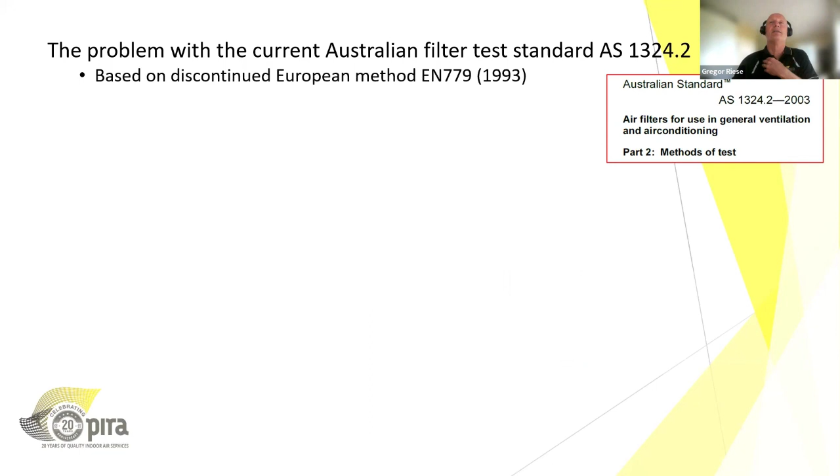1324 is based on an older European method called EN 779, which was developed in 1993. They're not identical, but they're very similar, and they're testing single particulates, not at the most penetrating size, but at 0.4 to 0.6 microns, and basing the filter performance on that one particle.

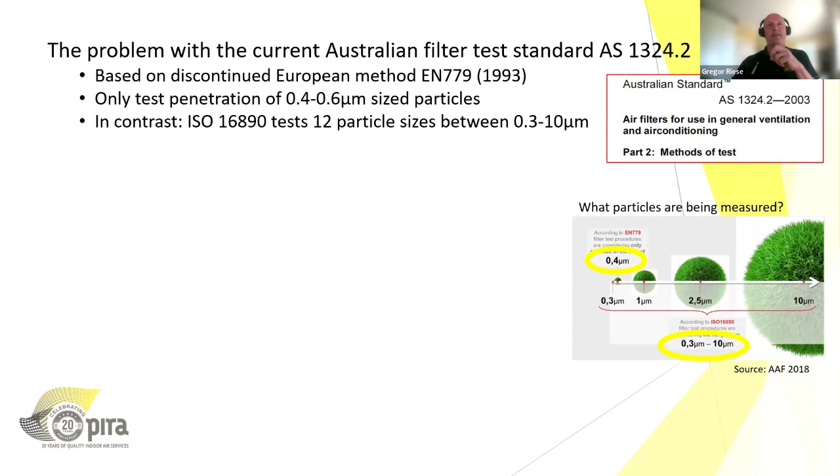The new 16890 actually tests 12 different particle sizes between 0.3 of a micron to 10 microns, and a whole range in between. It's a much more comprehensive testing regime that actually tells you how the filter is performing.

AS 1324 and the European standard also ignore the electrostatic charge effects on a filter. These are charges that are often placed on filters that make them more effective, particularly in screening out smaller submicron particles. What happens though is that filters, when you operate them in the real world, can often lose that electrostatic effect, and then your filter becomes much less efficient, up to 25% less efficient in capturing some of those smaller particles. So as I say here, your F7 may actually be a G4 after discharge.

The other feature of 1324 is that it allows an accuracy of plus or minus 15% efficiency, which is quite a broad range. The new ISO standard is down to the nearest 5% performance. So that's what that means in net effect.

Looking at this next slide is the data I could gain in terms of actual performance according to the European standard. This is performance data to EN 779, given the very similar method that 1324 operates under. This is what the filters are supposed to be doing over here, and this is what the filters were actually doing when they tested them. And what you can see is a very broad range of different performance.

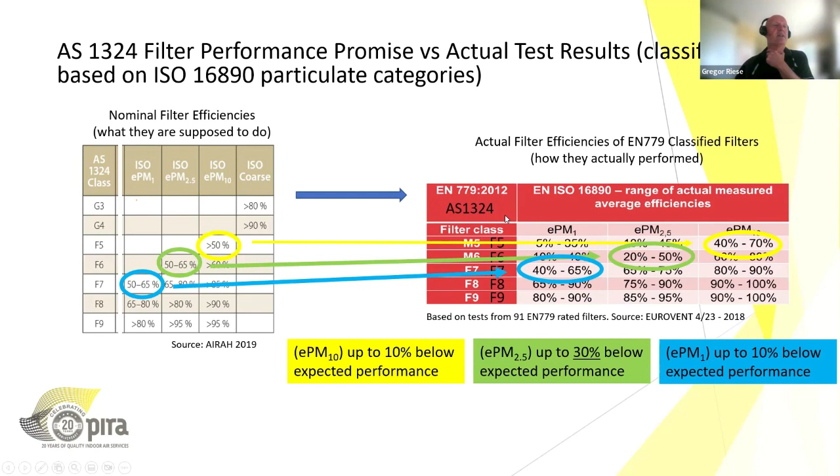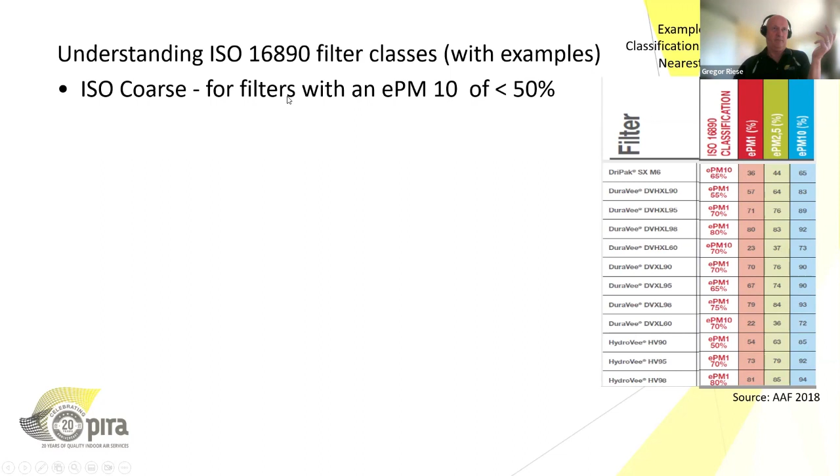So having a look at how the new filter classes work, and I'll just show you some examples of those. There's basically 4 general categories of filters under the 16890 series. There's ISO coarse, which are basically filters nearly out of scope. These capture less than 50% of the 10 micron particulates. It's possible that someone will be selling some ISO coarse filters in future, but they're not terribly effective.

So the ISO PM10 filters capture a minimum of 50% of the 10 micron particulates. So I've just put a graph here. This is from AAF, and this is some of their filters that have been tested to the ISO classification.

And this is the results from testing under the new ISO regime. So this particular filter, the DriPak, only caught about 36% of the PM1s and 44% of the PM2.5s, but it's capturing 65% of the PM10s. So this filter can now be classified as an ePM10 65%. And this is the sort of designation you'll see going forward with filters.

Instead of F6, F7, F8, you'll be talking this sort of naming convention. Similarly, the one down here, the DuraVee, is obviously not capturing enough PM1s and PM2.5s. It's only 22 and 36%, but it's 72% PM10s. So it's an ePM10 70%. It took me a while to get my head around this naming convention, but after you've got a grasp of it, it's pretty straightforward.

Now, in my picture here on the right, there's no PM2.5 filters shown, but the same naming convention applies when we get down to PM1s, ISO PM1s. You can see down here, the HydroVee filter is capturing 81% of PM1s. It doesn't capture 100% of the PM2.5s and PM10s, but this is the critical one. So this becomes a PM1 80%.

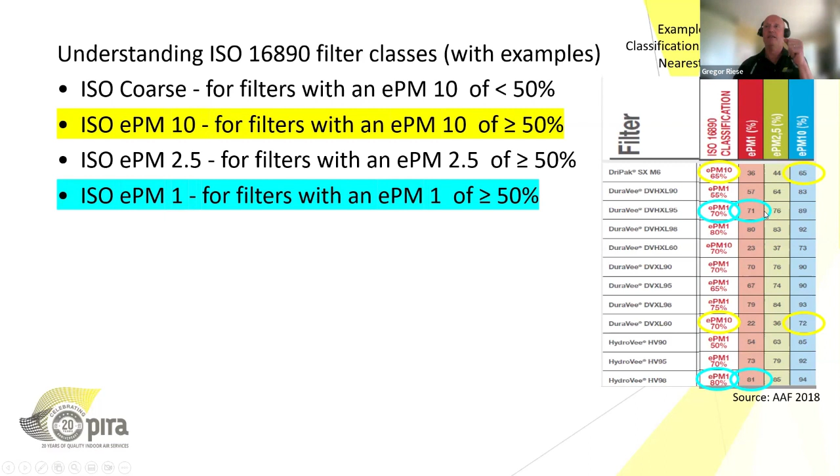The DuraVee filter up here is capturing 70% of the PM1 particulates. So these are the high efficiency filters, and they're meeting a minimum efficiency for that particulate filter size.

Now, choosing the right filter is a separate question altogether. And it's another complicated question, unfortunately, because it depends on what supply air you need, and on the quality of the outdoor air. This sort of makes sense, but when you see one of these tables for the first time, you think, goodness, why can't the world be simpler? Here's the outdoor air categorization, and you'll get data for outdoor air for different regions. There's basically three categories of outdoor air, 1, 2, and 3, with 3 being higher particulates, PM1, PM2.5s, and PM10s. Outdoor air 1 being the cleanest, with less than 10 and 20 of those respectively.

And the supply air categories are also arbitrary classifications, but as you can imagine, for hospitals, there is a requirement for supply air 1. So these are how they're defined in the Eurovent documentation. So for most hospital facilities, if you're talking to your mechanical contractors and having a conversation around what sort of filters you're looking at,

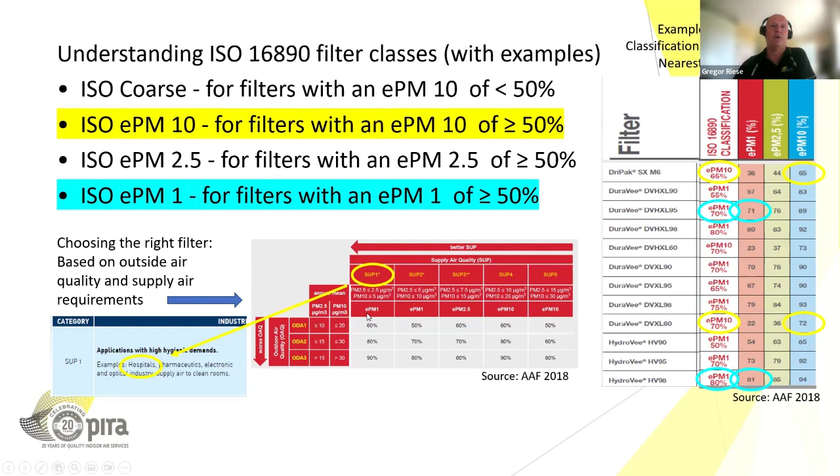as you can see, these are the categories going from the coarser, that might be an industrial environment, the supply air 5 category. But when we get down to hospitals, we go from the PM10s to the PM2.5s to the PM1 filters. And with very good outside air, a 60% efficiency PM1 would be expected for most hospital facilities based on this classification. But it may vary depending on your outdoor air quality, where you happen to reside. If you're in the middle of Melbourne, it's going to be different than if you're somewhere more regional.

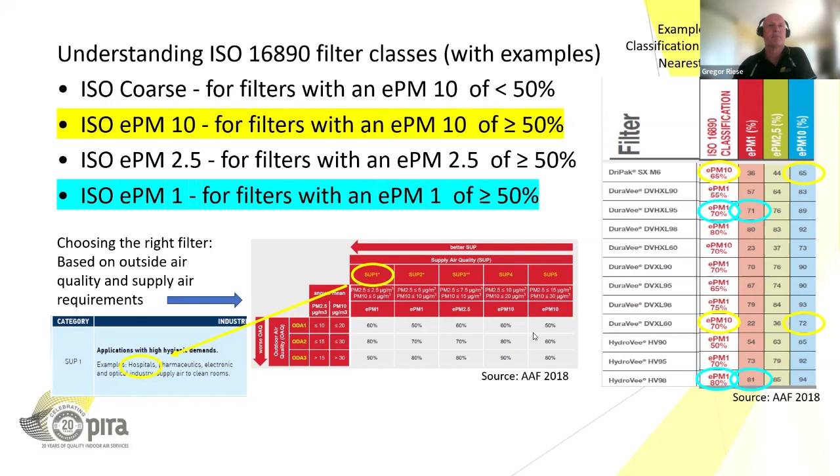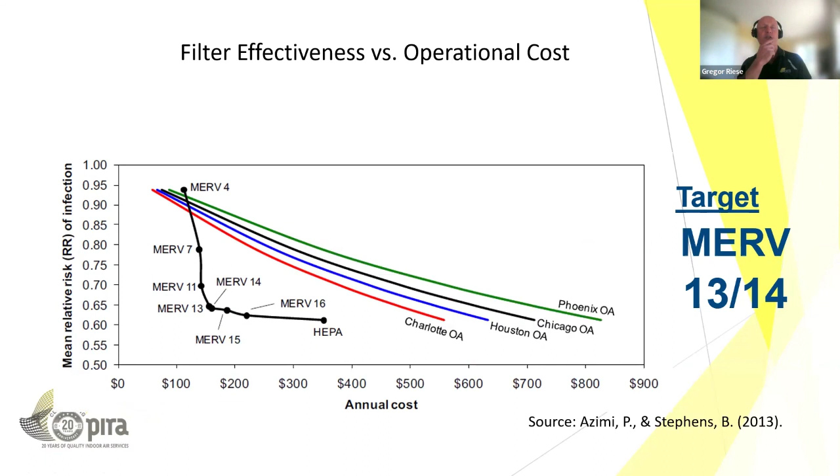Okay, I'm getting back to the classification, but this is a very influential graph and a very influential publication. I'm finding everyone, and by everyone I mean ASHRAE and folks like that, are referencing this paper. This paper looked at the annual cost of running a filter and graphed it against the mean relative risk of an infection. And sorry, this is now the MERV grade of filters, which is the US grade of filters, so just don't worry about that.

But essentially that's equivalent to an ISO coarse, and these ones up here are equivalent to an ISO PM1, like a 60 or 70%. So they're getting more and more efficient. A coarse filter gives you a very high risk of infection, but a very low cost of operating. And what was nice about this study is the way that this graph turned into a lovely curve where, when you go past MERV 13, MERV 14, it starts to get very costly because of the pressure drop to run those filters.

Your sweet spot is down in this corner where you've driven down the relative risk of infection, and you're still achieving reasonable costs. And of course, once you get out towards HEPAs, no surprise that your running costs go up considerably. In a simpler world where there's abundant energy, everyone would be running HEPAs perhaps. So this is the basis for the ASHRAE recommendation. That's the American HVAC association, a very authoritative group over there.

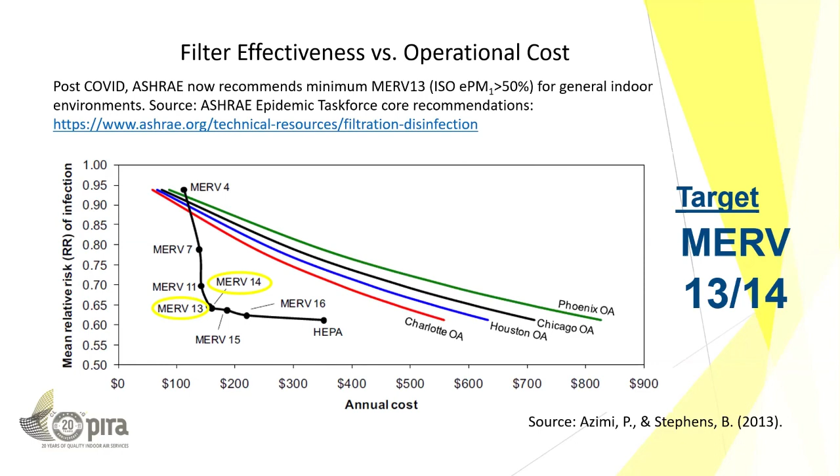So this graph has been very influential, and it's the basis for the MERV 13 recommendation for general indoor air environments. So where all else fails, if you're designing a new system, MERV 13's a great option.

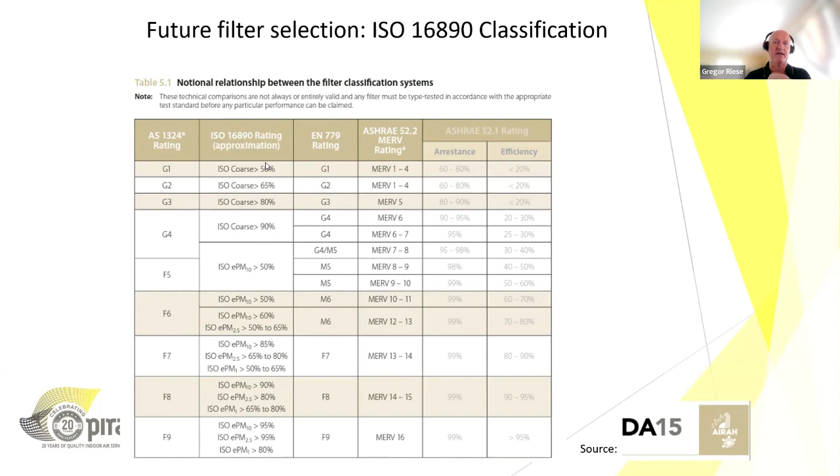This is a graph, and it's like a translation table, if you like, between the different rating schemes. It's showing us the Australian standard rating alongside the ISO rating, alongside the European rating, alongside the ASHRAE rating. So it's actually a really helpful graph if you're dealing with multiple different suppliers. Some filter suppliers will supply in MERV categories. Some will typically quote an EN rating, even though it's a legacy rating. Most of them are now going to the 16890 rating.

This is out of DA15, which is the AIRAH publication on indoor air quality. It's a fantastic publication and I recommend it to members if you haven't got it, just for general advice and having in your collection. And sorry, that's the current default recommended rating coming out of ASHRAE at the moment in terms of filtration through your HVAC system.

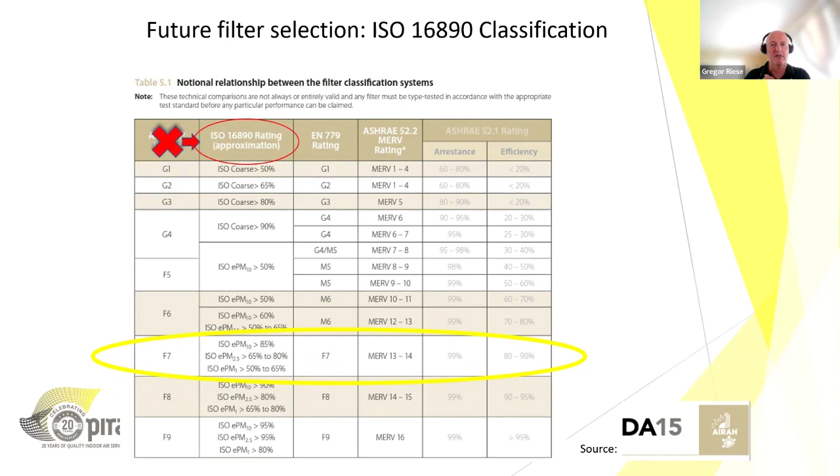And that'll be gone, and you'll be using this classification running down that column. So typically, this is just a quick snapshot. This is a European filter supplier, and it shows you the ISO classes on the right-hand side here, how they're categorised for the different product and part numbers down here. It also has the legacy EN 779 rating down that way. So you can see this range here ranges for a PM10 of 60% running down to the much finer PM1 65%.

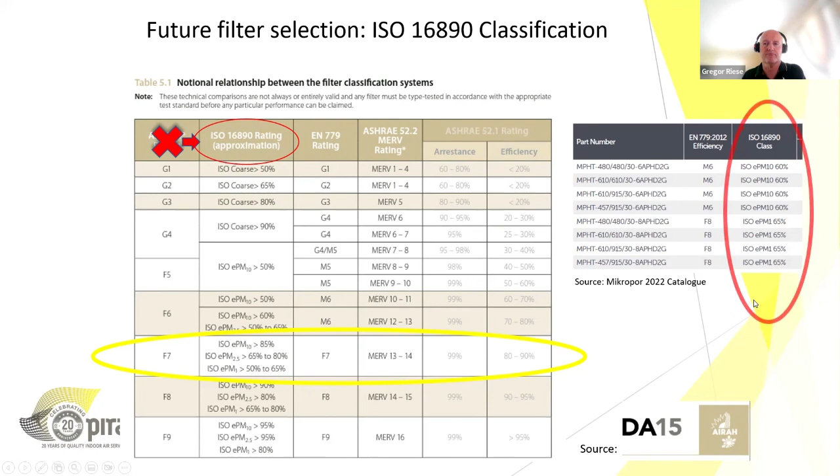It seemed remiss of me not to mention a little bit about the test method, but I don't want to talk much about this because it's complicated, funnily enough. The ISO 16890 series actually forms a 4-part series. Part 1 is the one which we're expecting to go on exhibition next year for consultation, and it's a standalone document. It sets out how that series operates, but then there's a part 2, 3, and 4. Part 2 is fractional efficiency, part 3 gravimetric, part 4 the conditioning method. This is again straight out of DA15, some of the most readable and helpful advice I got on the new ISO series.

Essentially, the first step of any filter coming through is that they're tested on a 0.3 to 10 micron scale for a non-conditioned filter. You'll remember earlier I talked about the electrostatic charge. The conditioned, non-conditioned is all about the electrostatic charge. Step 2 is conditioning that filter to remove the electrostatic charge. They use isopropanol vapor, and then it's measured again. So you repeat step 1 without the electric charge.

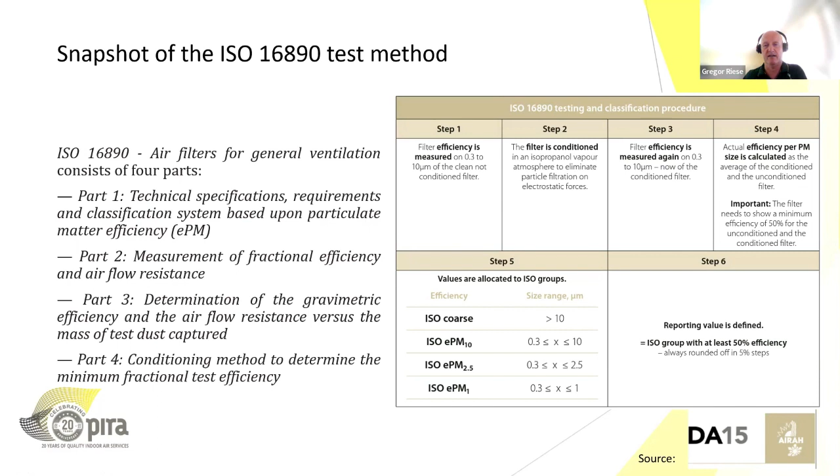So what's next? The committee has agreed, and I hope I'm allowed to report this, that part 1 will go on exhibition, and it's likely to occur next year. So you'll see Standards Australia put out a request for comment on that draft standard. We've essentially adopted it; we have not modified the ISO document. We've added a few extra things around how we warrant something is actually being tested to that standard. The reason parts 2 and 4 haven't joined the exhibition is that the ISO committee is currently changing technical bits of parts 2 and 4, so they can't be consulted on yet. There'll be 2023 or late 2022 versions of those as well.

But if AS ISO 16890 then gets adopted in Australia, there'll be a 2-year transition period for the 1324 method. So anyone relying on those has 2 years to get their filters tested under the new standard.